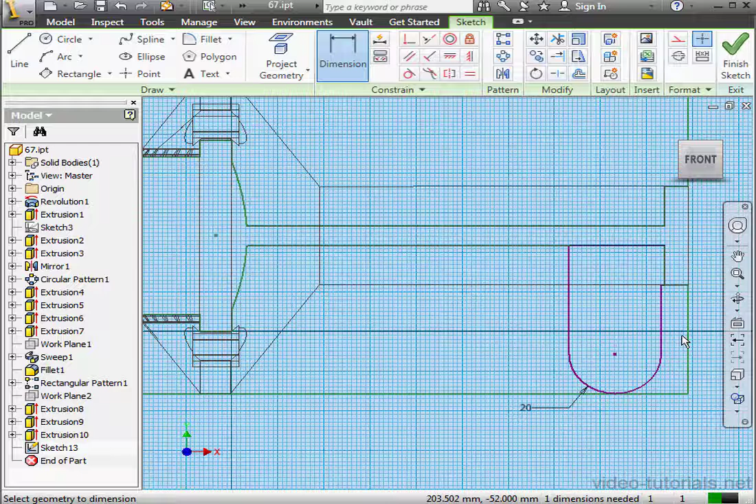Okay, let's apply some dimensions and constraints now. The radius of my arc will be 20 millimeters, and this distance I'll make 15 millimeters.

Let's just zoom out so we can see a bit better. Let's activate the rectangle, 3-point rectangle tool. My first point, second point, and my third point I'll drop out here. Now for some constraints: the midpoint to this line point will be coincident.

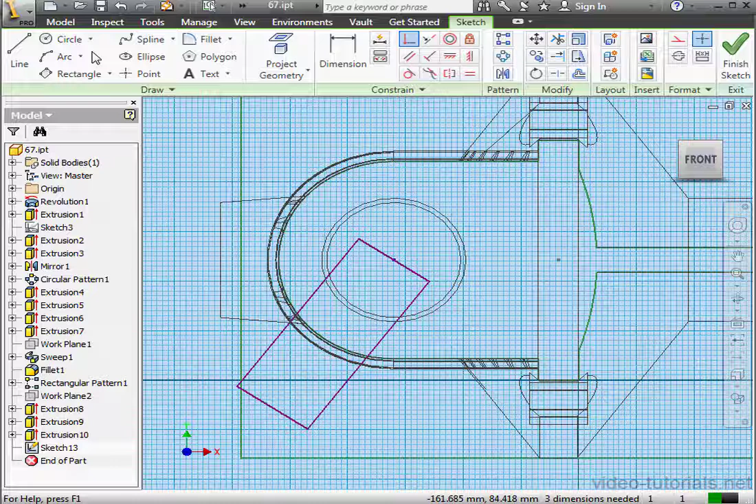Let's activate the 3-point arc tool. Here's my first point, my second point, and my third point. Let's apply a tangent constraint between the arc and the bottom line. Another one here.

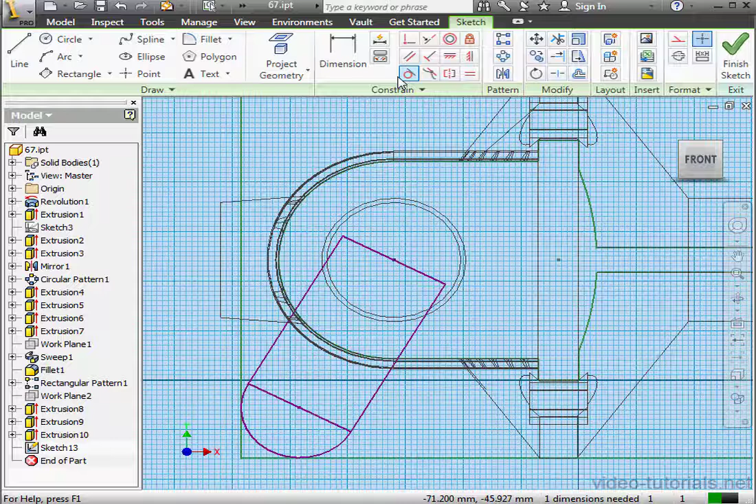Now for some dimensions. Let's right-click and select the aligned dimension. This will be 40 millimeters. OK, and escape to exit the tool. Let's select and delete this line now, and I'll finish the sketch.

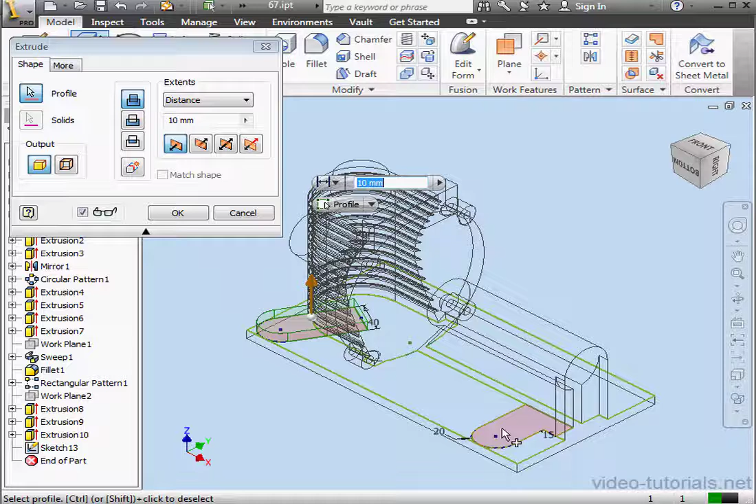Activate the extrude command. Let's select my profile. For the depth, let's make it 8 millimeters. And click OK.

Now we're ready for the bolt holes. Let's create a sketch for that. Activate the circle command. Project geometry. Let's select the arc and create a second circle.

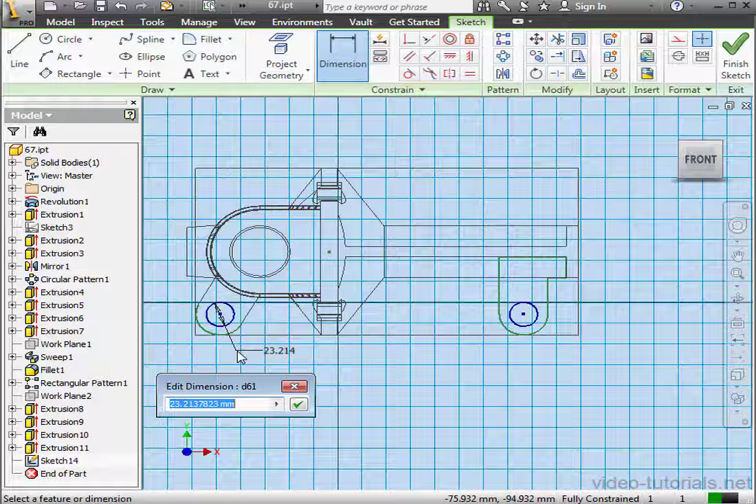Apply an equal relation to both of these circles. And now for dimensions, the diameter will be 15 millimeters. OK, and let's finish the sketch.

Now the extrude command. We'll select the first region and the second region. Extents through all. Let's accept.

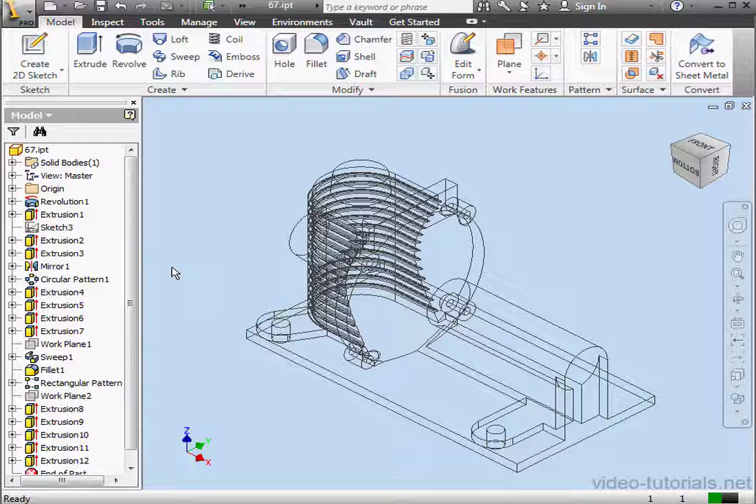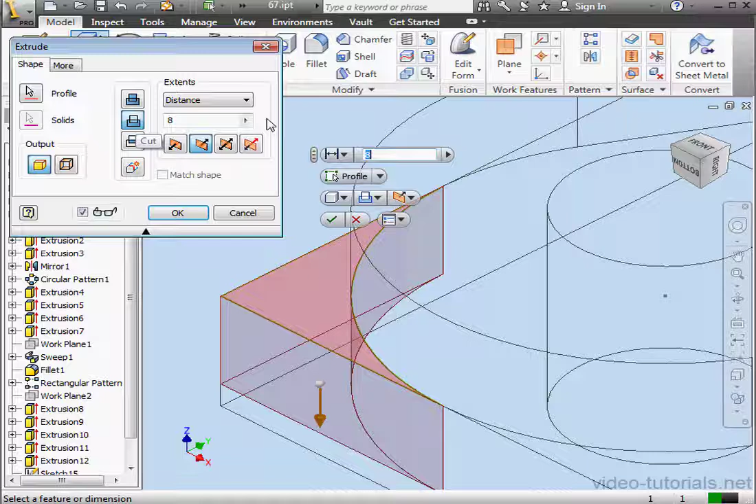Lastly here, we need to cut this corner. Right-click, New Sketch. The projected geometry was already created. Let's click Finish Sketch. Activate the Extrude command, use the Cut mode, extents through all, and let's accept.

Now we'll take a Shaded with Edges view. This will let us get a better look at our model.

Lastly here, we need to apply the Mirror tool. Let's select the features to mirror: the bolt pads, the bolt holes, and the corner cut. Now we select the mirror plane. Let's use the XZ plane. And click OK.

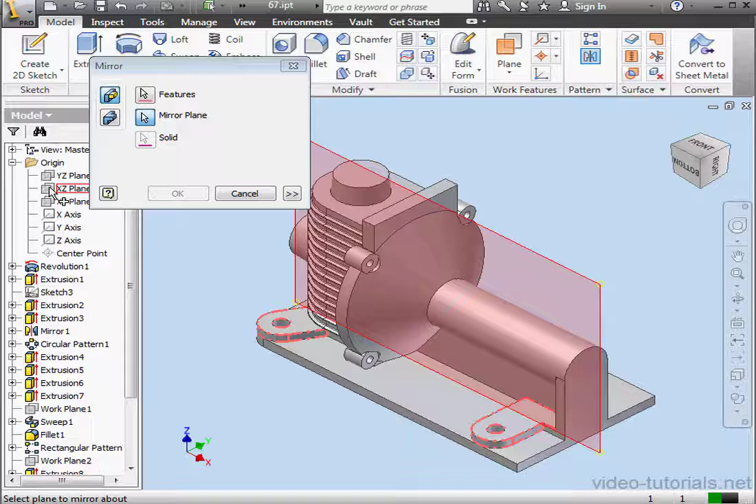And here is our model, really taking shape now. Don't forget to save your part. And this concludes our 6th lesson on creating this gear housing.